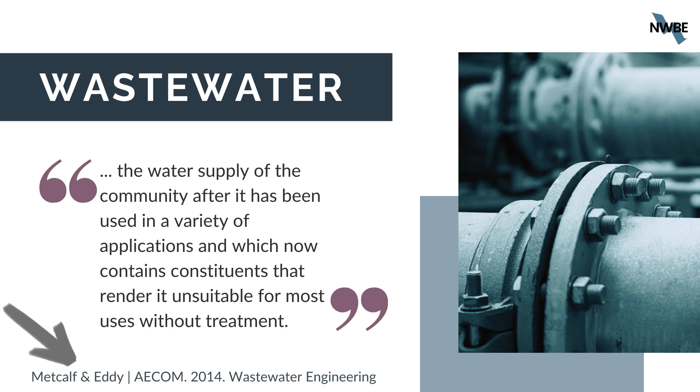So wastewater is the water supply of the community after it has been used in a variety of applications and which now contains constituents that render it unsuitable for most uses without treatment. This definition comes from the book Wastewater Engineering, Treatment and Resource Recovery by Metcalf and Eddy, which is now part of AECOM and was published in 2014.

Wastewater is known by other names, and its aliases include used water and sewage. In fact, there is a movement underway to embrace used water instead of wastewater, but that term hasn't become widely used yet. And as you'll see, even though wastewater is sometimes called sewage, it usually isn't just sewage, although it can contain sewage.

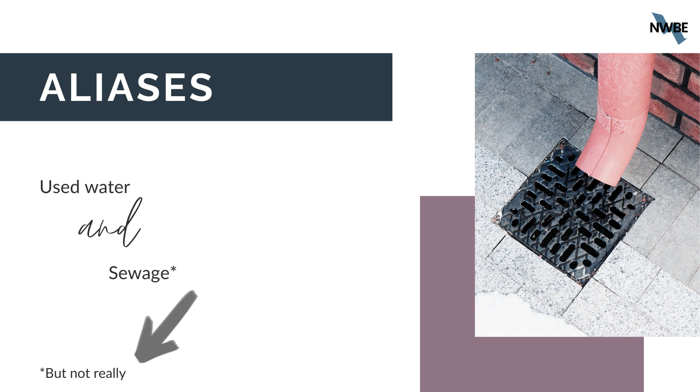So we started treating wastewater with biological treatment processes in this country more than 100 years ago, really to prevent the spread of human disease. And wastewater treatment, when done correctly, is quite good at protecting both human and ecological health.

But the field has evolved, and now wastewater aspires to be so much more than just used water needing treatment before discharge into a receiving stream or river. Wastewater aspires now to be a source of energy through anaerobic digestion of biosolids, a source of information through wastewater-based disease surveillance, and a source of nutrients, mostly nitrogen and phosphorus. And of course, the clean water itself in wastewater can be reclaimed and reused.

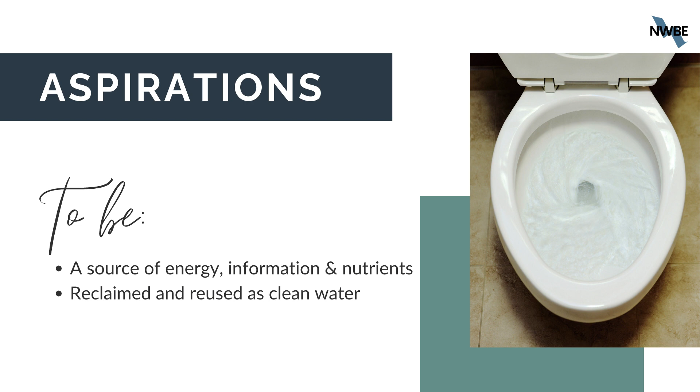You'll learn more about wastewater treatment, including energy and nutrient recovery, in part 3 of this series, and a little bit about water reuse in part 4. So what exactly is in wastewater?

Well, there are many constituents in wastewater, and I like to think of them as being comprised of 4 elements. The first, on the upper left-hand corner, is what we usually refer to as sewage, or more specifically, domestic sewage, or rather ironically, sanitary sewage. This is the used water from sinks, toilets, washing machines, dishwashers, tubs, showers, and similar fixtures in residential and institutional settings. The second constituent, shown in the upper right-hand corner, is stormwater.

This includes direct inflow into the sewer from rain, snow, snowmelt. It's basically anything that ends up in a storm drain during or after a storm event. The third constituent, shown in the bottom right-hand corner, is infiltration and inflow, and together these are called I&I, designated as a capital I / capital I.

So infiltration, that first I, is groundwater that enters sewers through defective pipes, pipe joints, connections, or manhole walls and joints. And it tends to be pretty constant for a given system. Inflow, the second I, is stormwater that enters the sewers through roof leaders, also known as downspouts, yard drains, manhole covers, and storm drains.

So I'm showing stormwater as a separate constituent of wastewater here. Really, technically, it is a type of inflow, but I like to call it out separately, and you'll see why in a minute. The fourth constituent of wastewater encompasses industrial discharges.

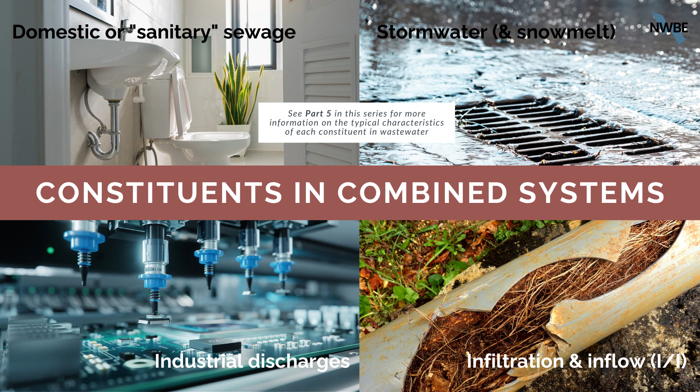But that's really it: domestic or sanitary sewage, stormwater, I&I (that's infiltration and inflow), and industrial flows. Now, all 4 of these will be present in what's called a combined system. A combined what, you might ask? Well, a combined system is one in which the domestic sewage, the I&I, and the industrial flows are conveyed in the same pipe network as the stormwater from storm drains.

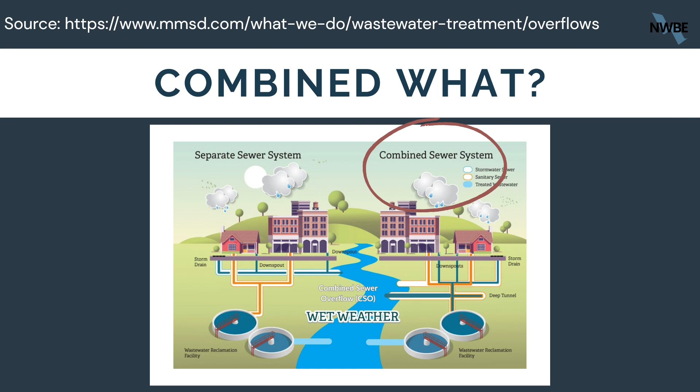In this graphic from the Milwaukee Metropolitan Sewerage District, you can see a schematic of a combined sewer network on the right-hand side. The domestic sewage and industrial flows plus I&I are represented by the orange lines, and the stormwater, the direct inflow from stormwater drains, is represented by the teal blue line.

And you can see they combine in the same pipe network. Well, the problem with combined systems is that they have to manage high storm flows, because all the rainwater, snow melt, and snow ends up in the same sewer as your sewage during what we call wet weather events. Wastewater treatment plants aren't usually designed to treat the absolute peak flow seen in a combined system during wet weather—that would be an inefficient use of resources to construct a plant that large just to treat the peak flows.

So they become a choke point in the system during wet weather events. Treatment plants do, and they can cause flows to back up into the sewer network and then overflow through what you can think of as pressure relief valves, or overflow structures, into nearby rivers, lakes, streams, and even the ocean. This occurrence of an overflow from a combined system is called a combined sewer overflow, shown in this blinking blue line on the slide. That's untreated sewage along with other things being discharged into a receiving water.

Now, many utilities have worked very hard to reduce the frequency of combined sewer overflows, or CSOs. Most often, this is done by building really big, deep tunnels to store peak wet weather flows, and that's what's shown on the schematic here.

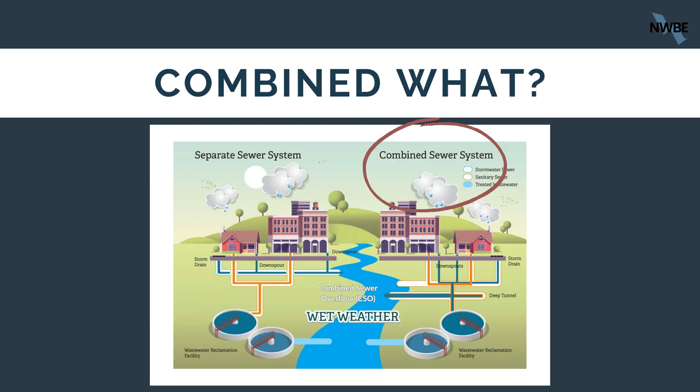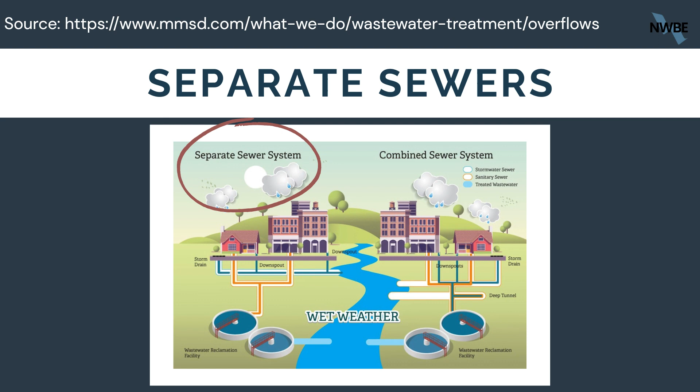But not all sewer systems are combined. Many, especially ones in smaller and newer cities, are separate sewer systems. That means domestic sewage, industrial flows, and regular I&I—not the inflow from storm drains—are conveyed in a separate pipe network to the treatment facility, as shown by the orange pipes in the left-hand diagram on this slide. The stormwater, which again can be rain, snow, or snowmelt, is conveyed from storm drains through its own pipe network and then out into receiving waters.

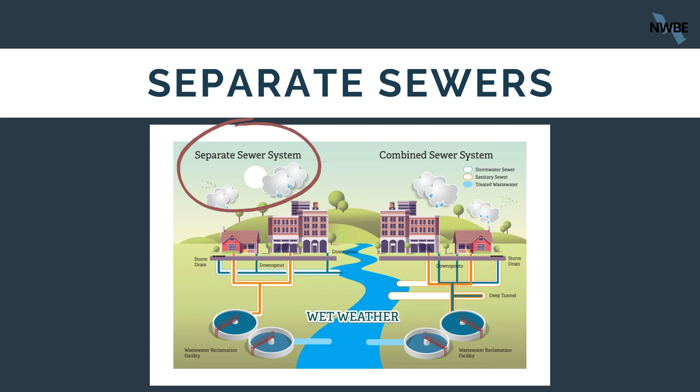These receiving waters can be streams, rivers, lakes, or even the ocean. Because stormwater doesn't contain the same high concentration of pathogens as sewage does, and routing stormwater away from the treatment plant doesn't lead to CSOs, this is an easier type of collection system for a utility to manage.

The constituents in wastewater reaching the treatment plant through a separate system then only include domestic or sanitary sewage, I&I, and industrial discharges. Again, the stormwater has been routed through a completely separate pipe network that is not conveyed to the treatment plant.

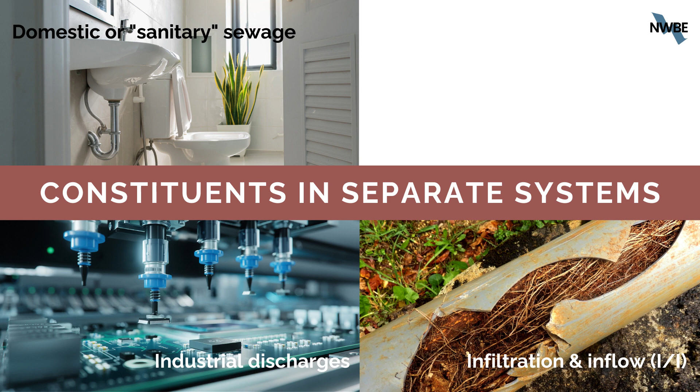By the way, you may be able to tell if a city has separate sewers just by walking around and looking at the ground. Manhole covers in separate sewer systems will usually indicate whether they provide access to the sanitary sewer, which actually has the sewage in it plus the other stuff, or the storm sewer, which only contains the flows from rain, snow, and snowmelt from the storm drains.

By the way, there is a lot of talk of moving away from the use of the term manhole, and alternatives offered have included things like access ports and maintenance holes. But again, we haven't moved away from manhole yet, and WEF is sticking with manholes for now, though we'll certainly update the terminology as needed.

So now that you know what the flow consists of, it's worth digging a little bit into flow patterns to treatment plants. Although this will be covered more in parts 4 and 5 of this series, understanding flow patterns will help you understand what you are getting in your wastewater surveillance sample.

So what I'm showing here in the graph on the right is what's called a diurnal flow pattern from an actual treatment plant in eastern Massachusetts. Diurnal flow pattern is just a fancy way of saying daily flow pattern. This plant has what's called an average daily flow, or ADF, of 6 million gallons per day, or MGD. So ADF is just that.

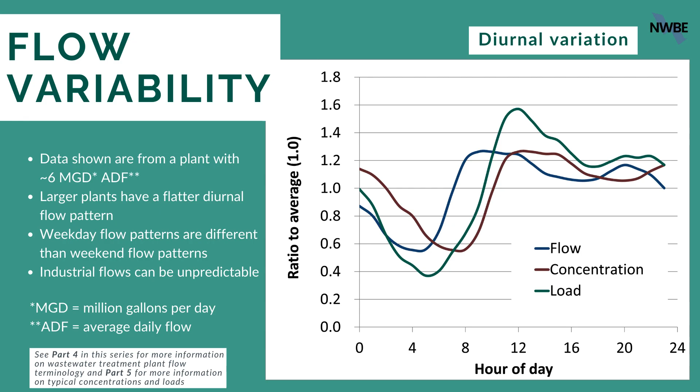And here is what flow to a treatment plant might look like over a few days, if those days include a storm event, or let's just call it a rain event. So the x-axis here is still showing time in hours, but now we're showing 4 days instead of 1 day like we were showing on the previous graph. And the y-axis is just any old units for flow that you want to imagine.

In this case, the so-called dry weather flow that includes infiltration only, industrial discharges, and domestic sewage is shown in dark red. This is the flow pattern we saw on the previous graph, but now just replicated over 4 days. We'll say these are 4 weekdays. And then the infiltration portion of that dark red graph is shown in green. As I mentioned before, infiltration tends to be pretty consistent over time from one system to the next. There could be seasonality to the infiltration. In coastal areas, there can also be tidal influences on infiltration, but in general, it's pretty consistent.

So a rain event comes along around hour 30 and right away inflow to the sewer - that's both direct inflow if it's a combined system through those storm drains, but also the other sources of inflow we talked about, through manhole covers and the like - starts to increase this right away. Inflow will continue to increase until the end of the rain event, and then we'll have quite a bit of a long tail after the precipitation is over as that rain water makes its way through the system.

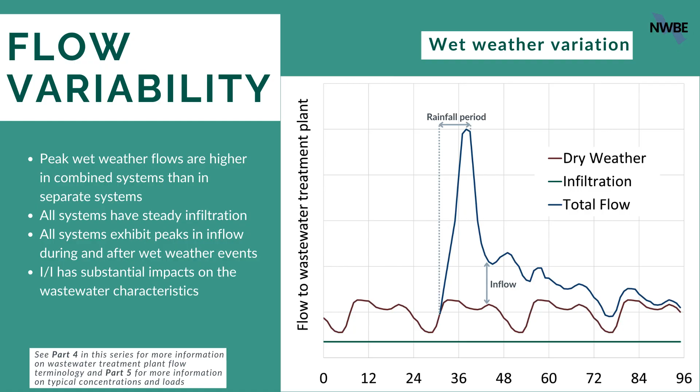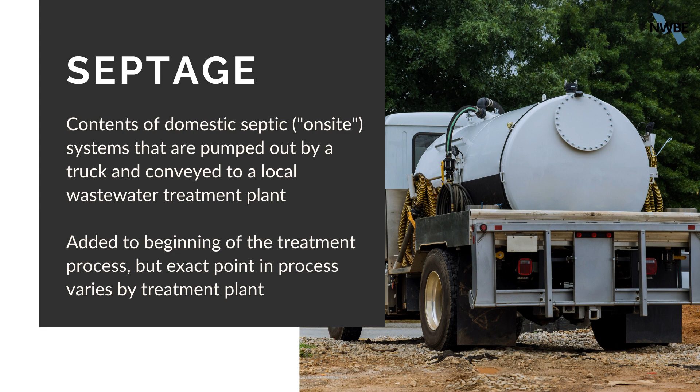It's also worth mentioning septage. Septage is the stuff that comes from domestic septic, also called on-site systems, that's pumped out by a truck and conveyed to a local wastewater treatment plant. These trucks add the septage to the beginning of the treatment process. There's a septage receiving station at treatment plants, but the exact point depends on the plant. So it's helpful to understand how much septage a plant accepts and whether that septage is added upstream or downstream of your wastewater surveillance sampling location.

Septage is nearly all domestic sewage. There can be some small amounts of indirect inflow and some infiltration too, but it's really mostly domestic or sanitary sewage. So just to recap the terminology: wastewater is the water supply of the community after it has been used in a variety of applications, and which now contains constituents that render it unsuitable for most uses without treatment.

Sewage is used water from sinks, toilets, clothes washing, showers, tubs, and dishwashers in residential and institutional settings. It's also known as sanitary sewage or domestic sewage. Industrial wastewater is wastewater discharged from industrial facilities, the composition of which depends on the type of industry.

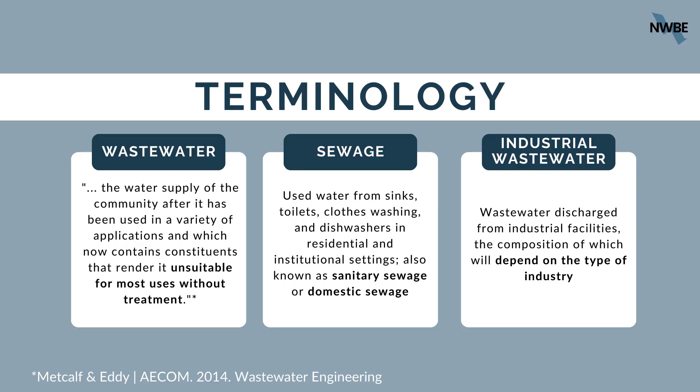Infiltration is groundwater that enters sewers through defective pipes, pipe joints, connections, or manhole walls and joints. It's the first I in I&I. Inflow is stormwater that enters the sewer through roof leaders, downspouts, yard drains, manhole covers, and storm drains. It's the second I in I&I.

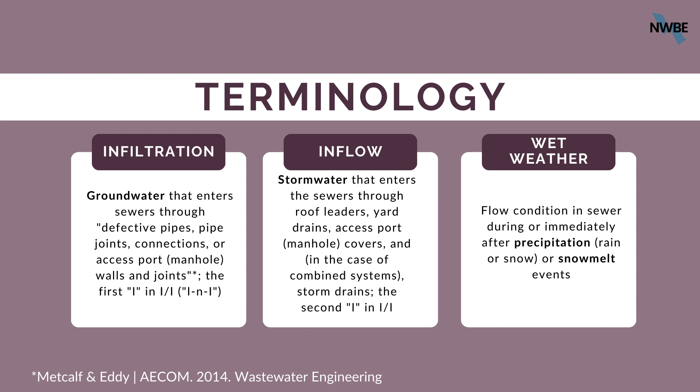Wet weather is the flow condition in a sewer during or immediately after precipitation, that's rain or snowmelt events. A separate sewer is a sewer system in which storm drain flows are routed to a different pipe network than the one conveying sewage, industrial discharges, and I&I. A combined sewer is a sewer system in which storm drains are routed to the same pipe network as the one that conveys sewage, industrial flows, and I&I.

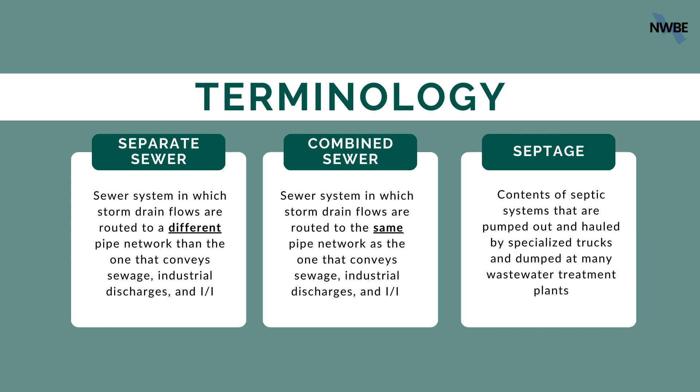Septage is the contents of septic systems that are pumped out and hauled by specialized trucks and dumped at many wastewater treatment plants. Not all treatment plants accept septage, but many do, especially smaller ones in rural areas, because there will be a lot of septic system users in the surrounding communities. MGD is million gallons per day, the typical unit for wastewater flow rate. The largest treatment plant in the US has a capacity of more than 1,000 MGD, or 1 billion gallons per day.

ADF is the average daily flow, the typical metric used to characterize how big a wastewater treatment plant is. It's calculated as the average of all 24-hour flows during a year. Diurnal is used to refer to the typical daily pattern of flow collected for treatment, with peak flow occurring around the middle of the day.

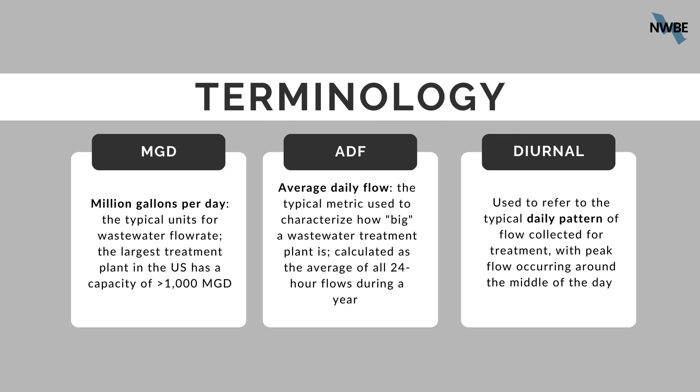Here are some questions you can ask your utility partners about the nature of their wastewater. Do you receive wastewater from a combined or a separate collection system? Are there major industries that discharge to your collection system? If so, how many and what types? Are there major institutions like universities or hospitals that discharge into your collection system? If so, how many and what type?

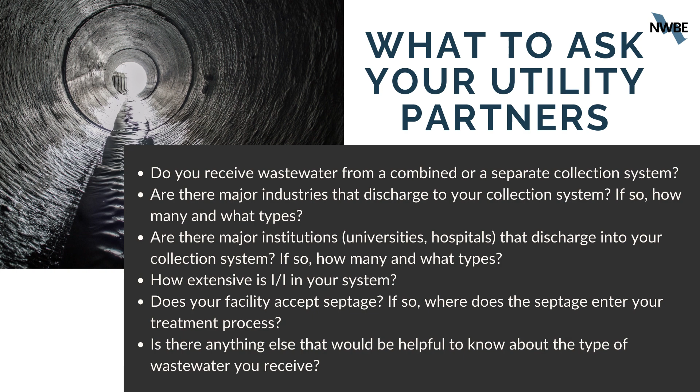How extensive is infiltration and inflow in your system? Does your facility accept septage? If so, where does the septage enter your treatment process—is it before or after you collect the sample that you send to us for wastewater surveillance analysis? Is there anything else that would be helpful to know about the type of wastewater you receive at your treatment facility?